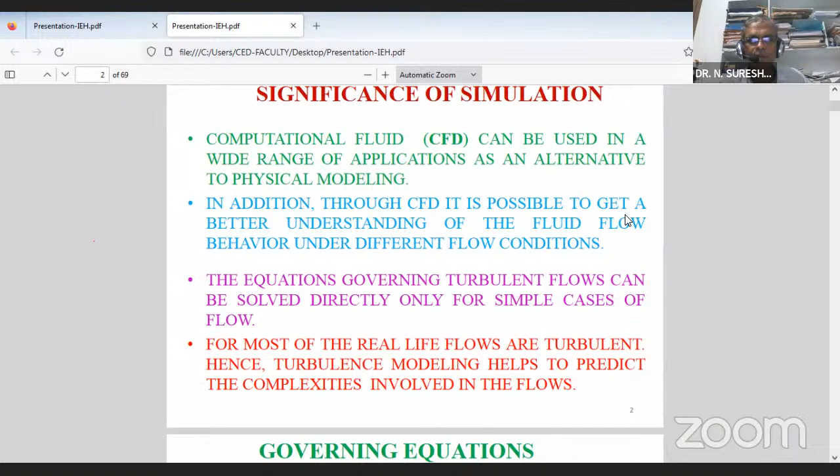The governing equations are given here - these are the equations used in the modeling aspect. There are actually 3 momentum equations and 1 continuity equation, so 4 equations total, and 4 unknowns: velocity component along the x direction, velocity component along the y direction, velocity component along the z direction, as well as the pressure term. So with 4 equations and 4 unknowns, there is no problem as long as the flow is in laminar state.

But when it comes to turbulent flow, there are additional terms coming into picture, primarily because of the fluctuating velocity components - u prime, v prime, and w prime. So the number of unknowns has actually become 7, whereas the available equations remain only 4. To cope with this scenario, these fluctuating velocity components are expressed as a function of mean motion so that the problem can be solved.

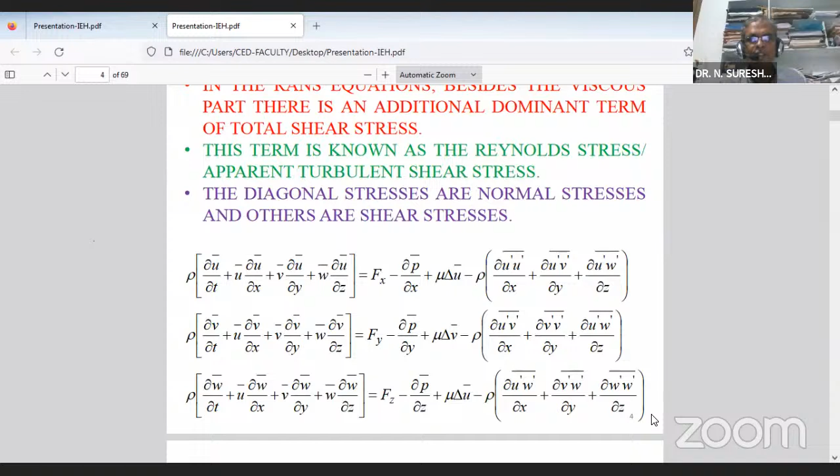This is what is called the closure problem. Closure problems basically make use of turbulence models. Two of the popularly used turbulence models are K-epsilon and K-omega.

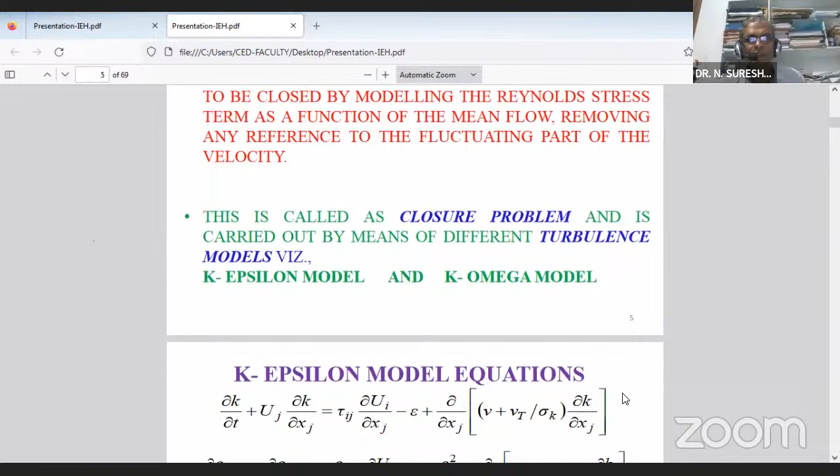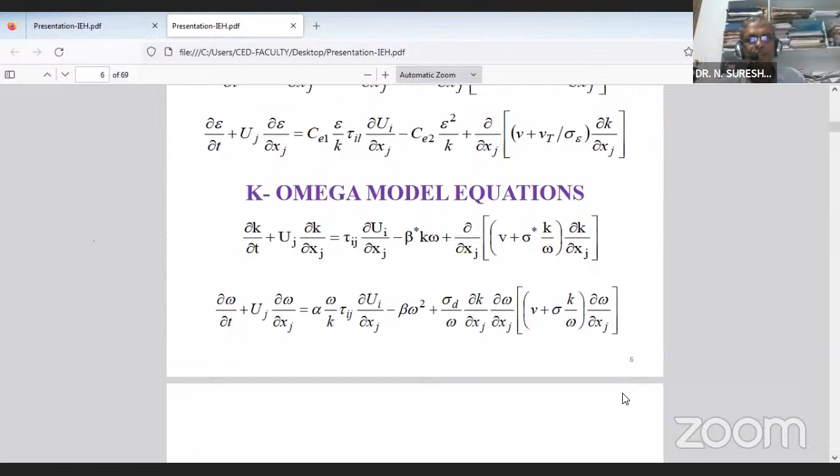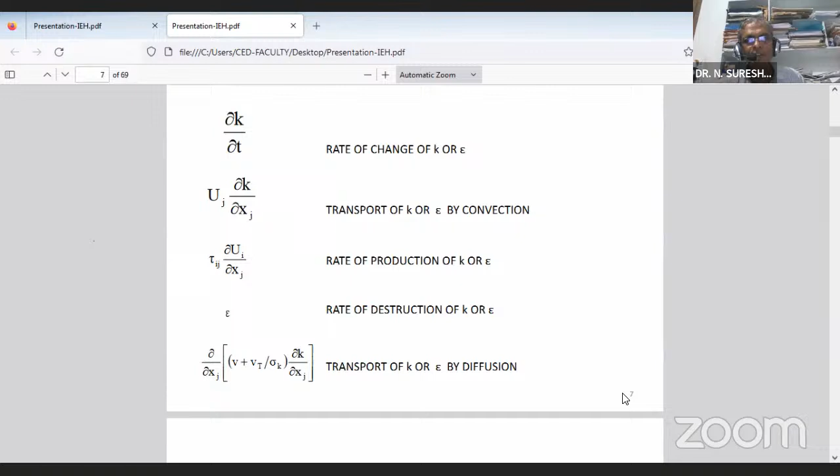The equations of the K-epsilon and K-omega models are given here. Each of these terms on the left-hand side as well as right-hand side represent: the rate of change of kinetic energy or energy dissipation, transport of K or epsilon by convection, rate of production of K or epsilon, rate of change of destruction of K or epsilon, and transport of K or epsilon by diffusion.

In case of simulation models, it consists of 3 stages: one is pre-processing, another is processing, and the third is post-processing. In pre-processing, one has to create the geometry - that means whatever the physical structure that is available, it has to be drawn to a suitable scale.

Generally, scale models are being adopted to create the geometry, depending upon the size of the model, so an appropriate scale model can be selected. There are different softwares available; one can even do it in AutoCAD or Design Modeler, and that can be imported into the software. ANSYS Fluent is one of the popularly adopted software for CFD purposes.

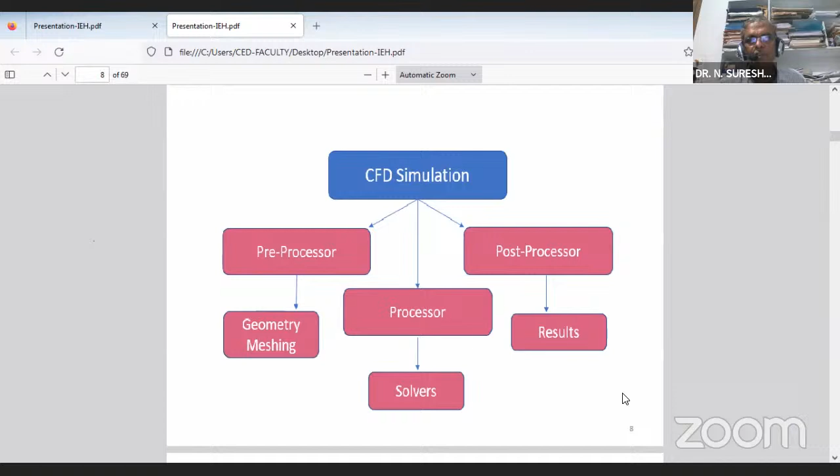Later on, one has to do meshing, which is generally done in order to discretize the flow field. Then from there, you go for the processing. In the processing, there are different solvers, and after making use of the solvers, you go for the post-processing wherein the results will be indicated.

The different solvers used in the processing stage are given here briefly. There are two types of solvers: pressure-based solver and density-based solver. Basically in civil water resources engineering applications, we make use of the pressure-based solver because density generally remains constant.

So either one can go for segregated algorithm or coupled algorithm. Generally, segregated algorithm is adopted, because the governing equations, that is continuity equation as well as momentum equations, are solved in a sequential manner rather than simultaneously. Some of the popularly adopted models are SIMPLE, semi-implicit method for pressure linked equations, or otherwise PISO is also adopted, which takes little less time.

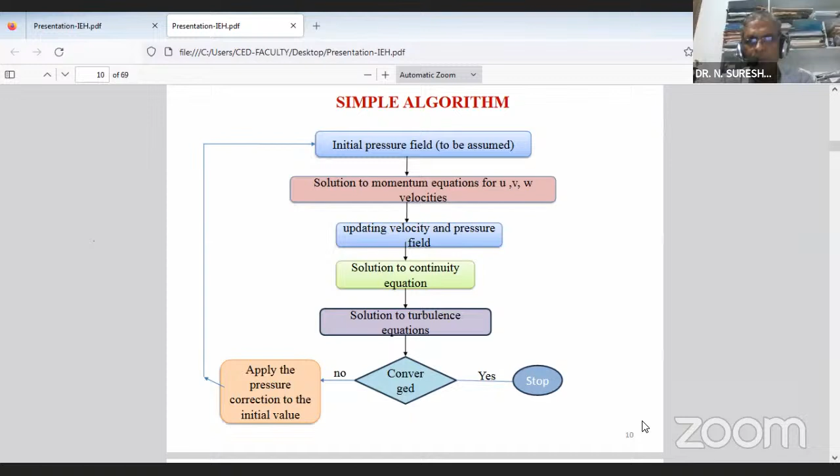The algorithm adopted in case of SIMPLE is given here. What one needs to do is assume some pressure field, then solve for the momentum equations as well as velocity components, then update the pressure field and substitute it in the continuity equation, then solve for the turbulence models. If the solution has converged, there is no problem; otherwise, you apply the updated pressure correction to the initially assumed pressure field. This process goes on in an iterative loop till the solution converges.

So what happens is, most of the time, or at least some of the times, the results obtained from the simulation models are not directly readable. They only provide qualitative information, not quantitative information. Under such circumstances, one has to go for what is called a user-defined function. A UDF is generally programmed in C language, and it can be loaded into the ANSYS Fluent software to get the quantitative information.

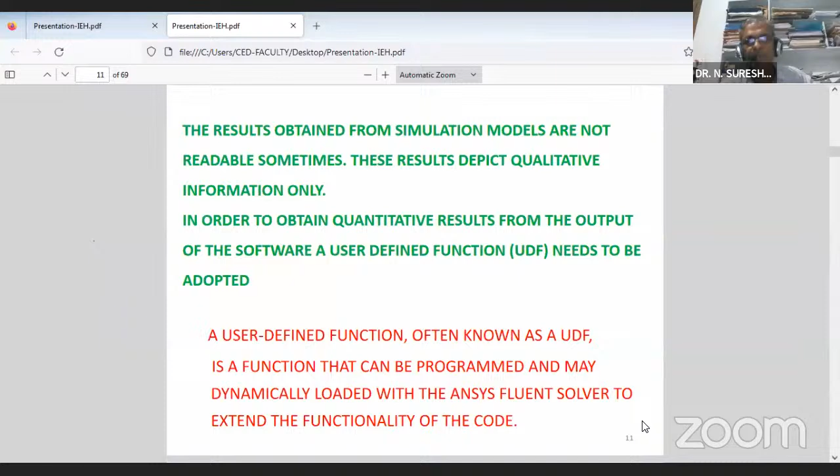Some of the features are given here, which one can program in C language. It has to make use of a udf.h file, then it has to be loaded into the software so as to get the desired information. That is what is done when the quantitative information is not available from the output of the software.

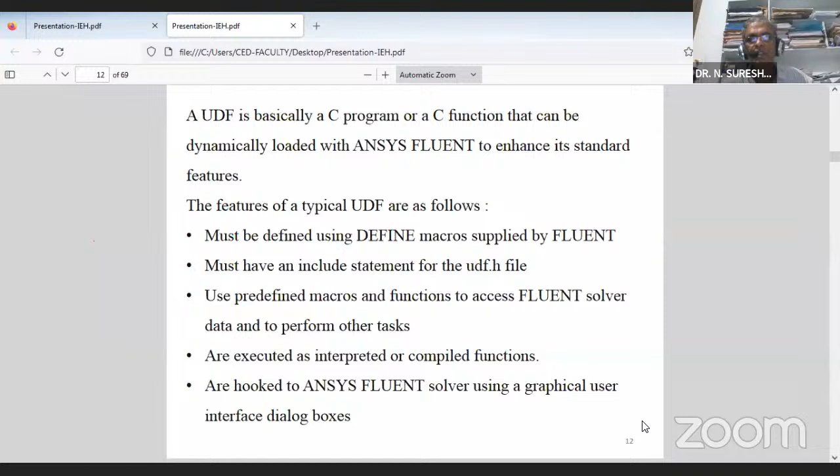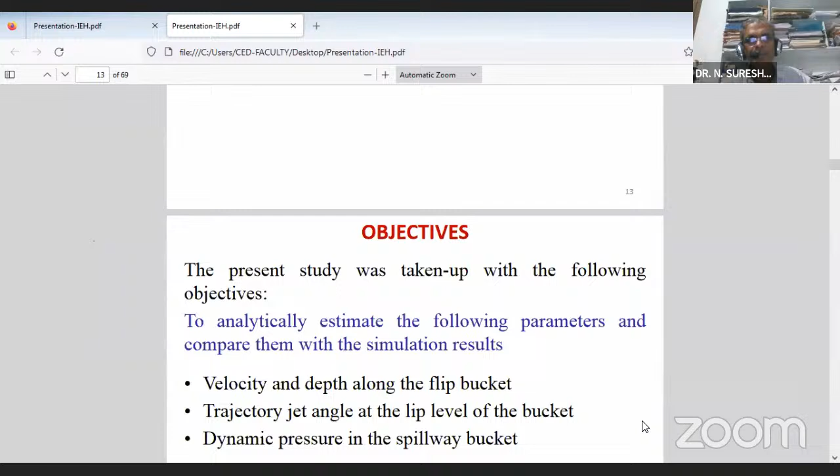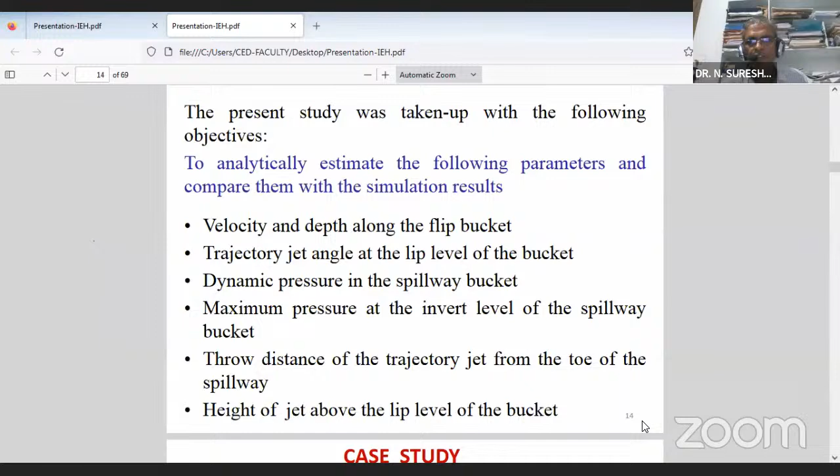This has been taken up with the objectives to compute the velocity as well as depth of flow along the flip bucket, then the trajectory, jet angle as it leaves the spillway bucket, dynamic pressure, maximum pressure, the distance of jet throw, as well as the height above the center line of the lip level of the bucket to the trajectory center line. Generally, to evaluate these parameters, physical modeling is normally done, but here we have gone for simulation.

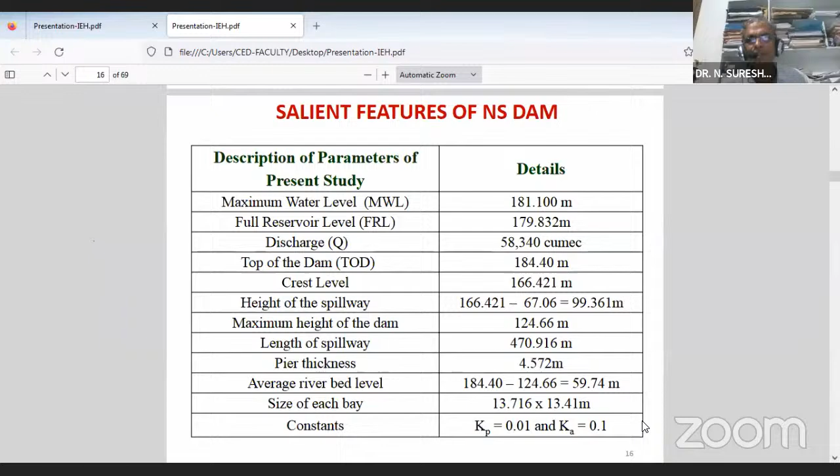The case study taken was the Nagarjuna Sagar Dam. The salient features are given here; the data has been taken from the irrigation department and is available on the website. Since most of the audience are field engineers, they may know these details much better than me. For the spillway profile, we adopted the USBR Waterways Experimental Station equation. We then computed the Froude number, and when you know the value of the Froude number, you can evaluate the bucket angle at the lip level of the bucket.

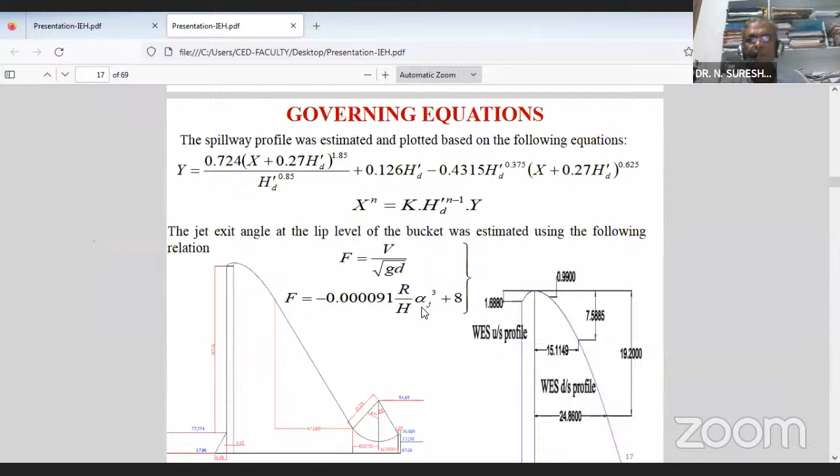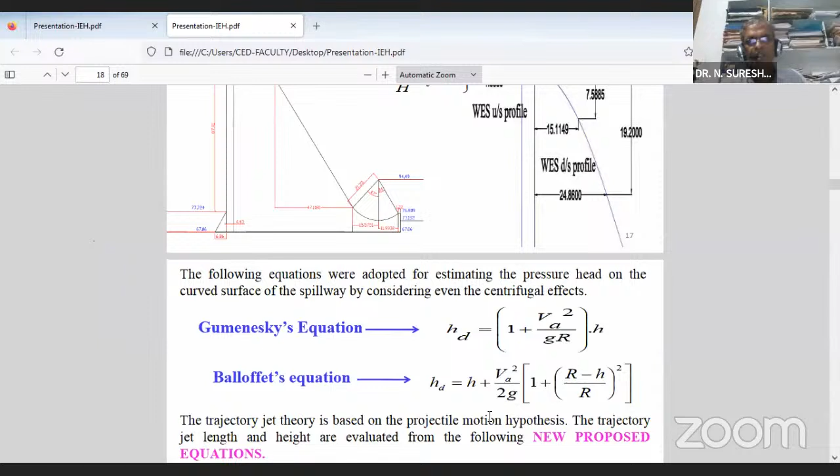Alpha j can be computed making use of the value of the Froude number. Then, in order to compute the maximum pressure in the bucket, two equations have been used: one is Gumenesky's equation and the other is Balloffet's equation.

Here, VA is the actual velocity of approach. But if you want the actual velocity of approach, one can only get the theoretical velocity of approach if you know the head over the spillway crest, as well as the height of the crest. From that, you will be able to compute it. An equation is available in the literature, so based on that, one can compute the theoretical velocity.

In the literature, a chart is also available showing the ratio between V actual and V theoretical. That ratio can be obtained from the chart available in the literature, and that is how one will be able to compute the value of V actual. Knowing V actual, one will be able to evaluate the value of HD.

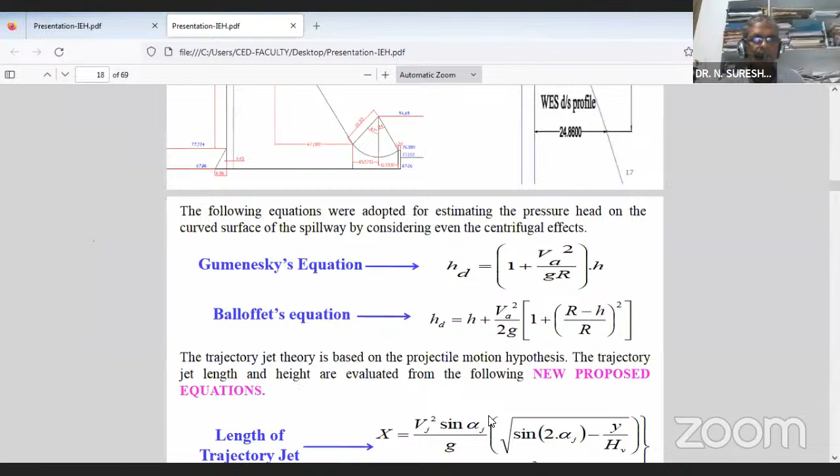Then, in order to evaluate the location of the impact point, we have proposed two equations. These equations are actually not available in the literature; we have proposed them based on the trajectory of the jet.

So, what is the location of the impact point from the spillway bucket outer edge point, as well as y, which is taken as the height from the lip level of the bucket to the center line of the trajectory. These are the equations which we have proposed.

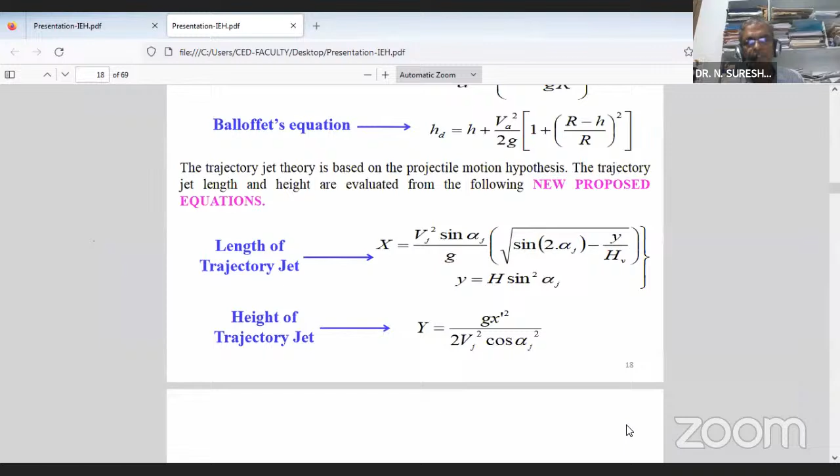These equations have been evaluated from the simulation results; from the simulation, we have actually proposed these two equations. First, because we were not sure what result we would get, we made analytical estimates.

From the continuity equation, Q equals area times velocity. You know the value of the discharge per unit length of the spillway: capital Q divided by L gives you small q, and small q divided by D0 gives the velocity in terms of Q by D. That is how the energy on the upstream side and at this point becomes available.

So you equate the energy at D0 and D1, or D1 and D2, to obtain the values of depth of flow in terms of Q, using a trial and error procedure. That is how we obtained the values of D0, D1 and D2. Knowing the depth of flow, we then computed velocity.

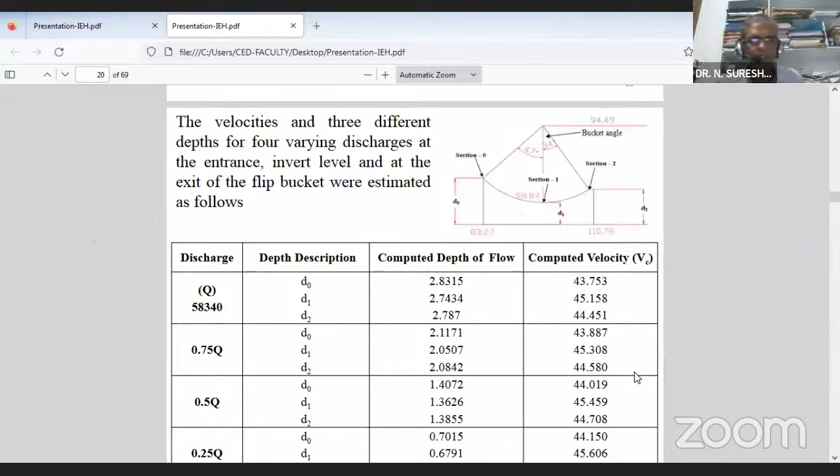So the depth of flow, the invert level of the bucket, the lip level of the bucket, and the trajectory angle—all these values we have computed for different flow rates.

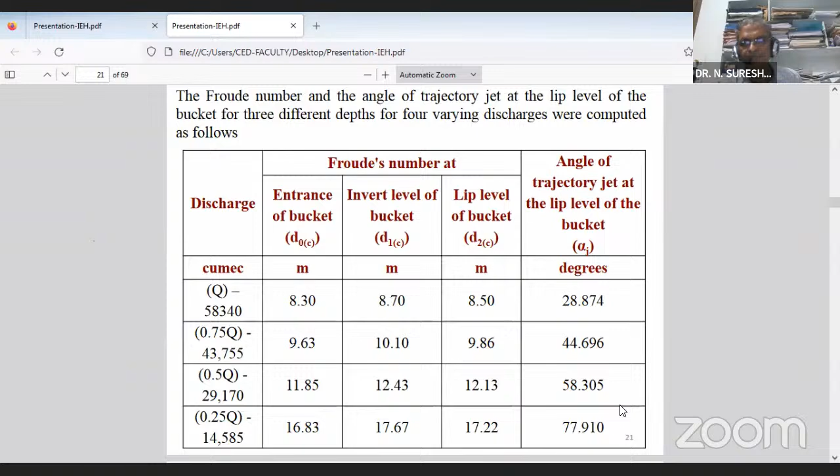Then dynamic pressure has been computed from half rho u v square, half rho u square, and the maximum pressure at the invert level of the bucket has been computed from either Gominski's equation or Balloffet's equation.

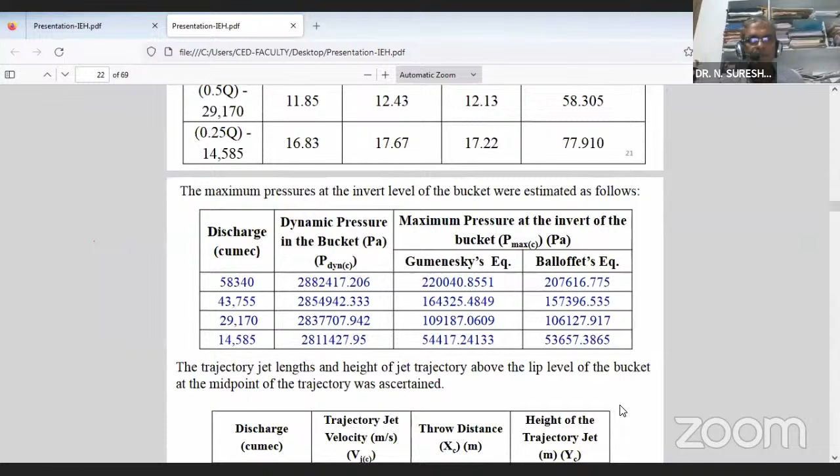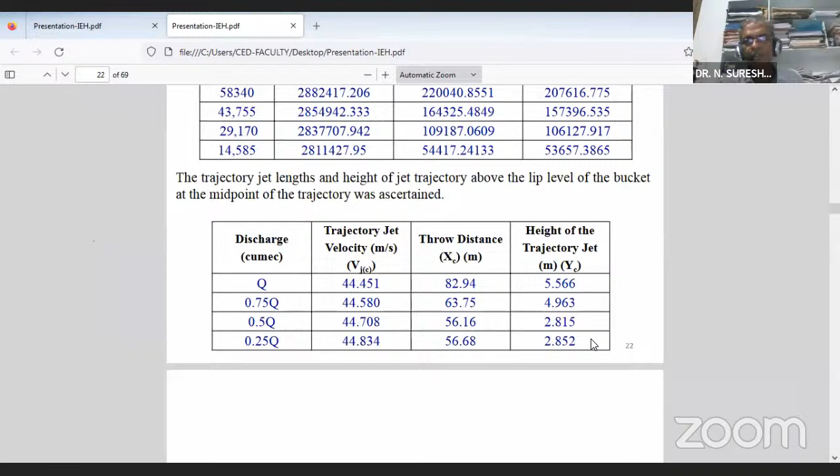So these are the throw distance as well as the height of the trajectory jet, which have been computed with the equations proposed by us. So these are all analytical equations. Then we have gone for the simulation.

The dam, that means the Nagarjunasagar dam, has been drawn to 1:100 scale. The boundary conditions are: we have given the velocity inlet, that means the velocity with which water is approaching over the crest of the spillway. And because on the top as well as downstream side there is atmospheric pressure, we have defined it as pressure outlet. Then we have gone for the meshing.

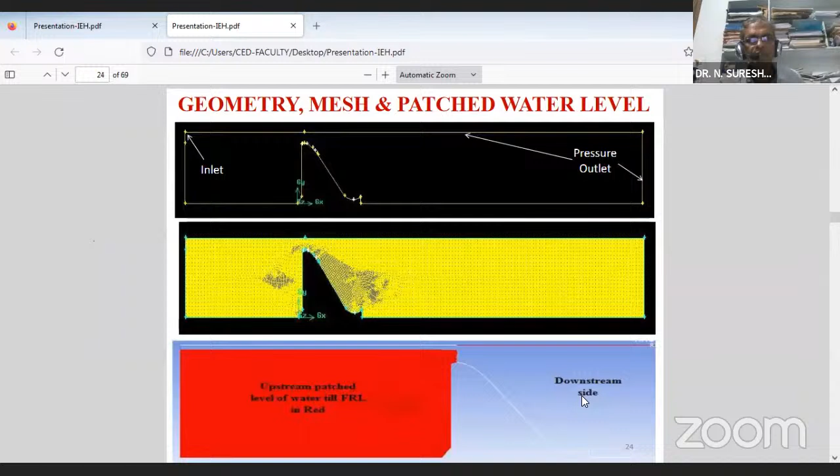In order to reduce the CPU time, we have initialized the flow condition. That means we have filled up water on the upstream side of the reservoir up to FRL, and then started the simulation. Here is the water surface profile as it glides down the spillway. We have extended our simulation process till it reaches the downstream end of the structure.

From the output of the software, you only get qualitative information. Here, red color represents water and blue color represents air, so this is a multi-phase problem. But it will not give you the actual values, so for that purpose we have gone for the UDF, user-defined function.

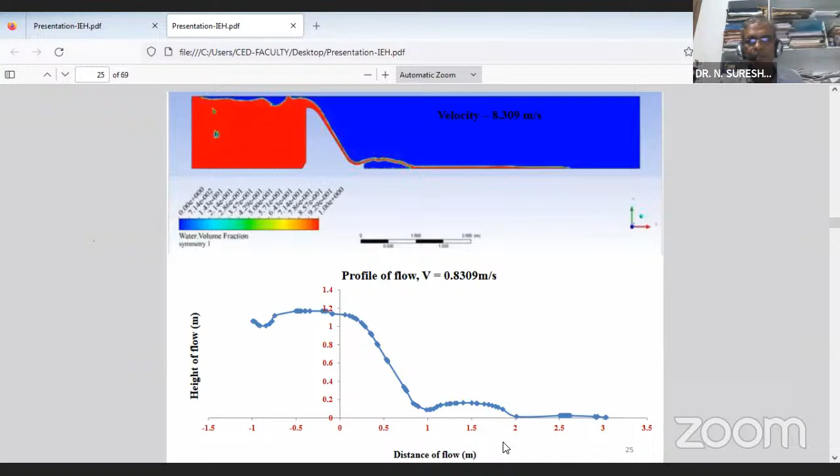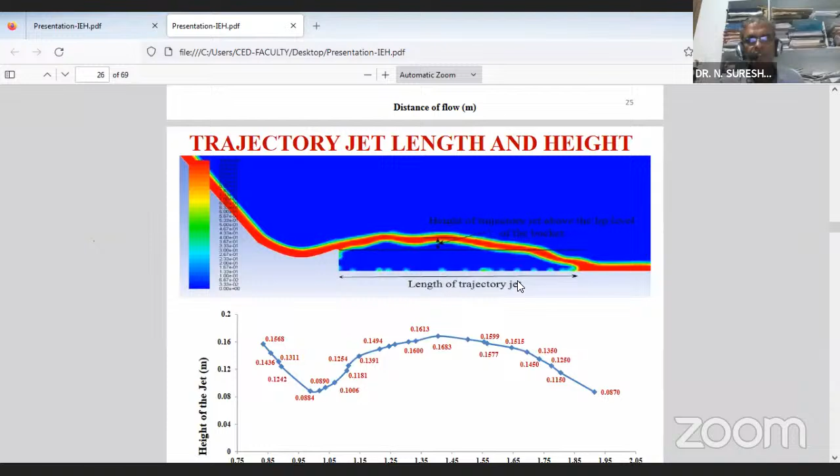That is how we have evaluated the values at different sections, taken from the axis of the spillway. This is the spillway edge, from the top of the lip level of the bucket up to the center line of the trajectory, which has been taken as Y. And from the spillway edge to the impact point has been taken as the X value. That is how we have computed the values of the trajectory jet all along its length as well as height.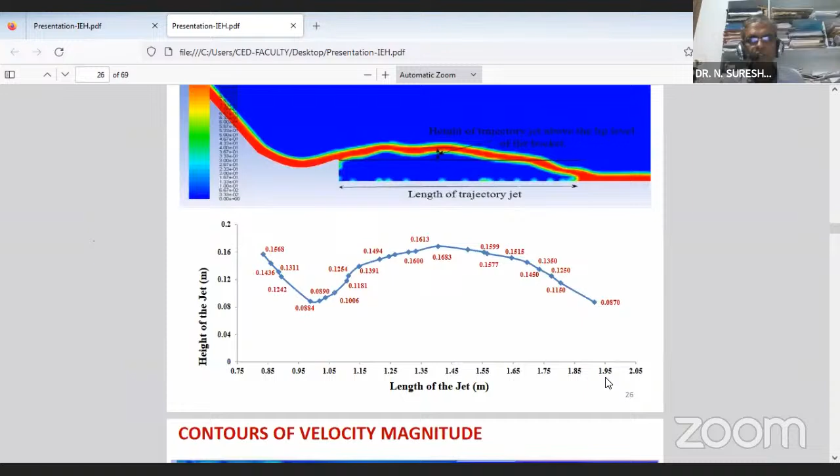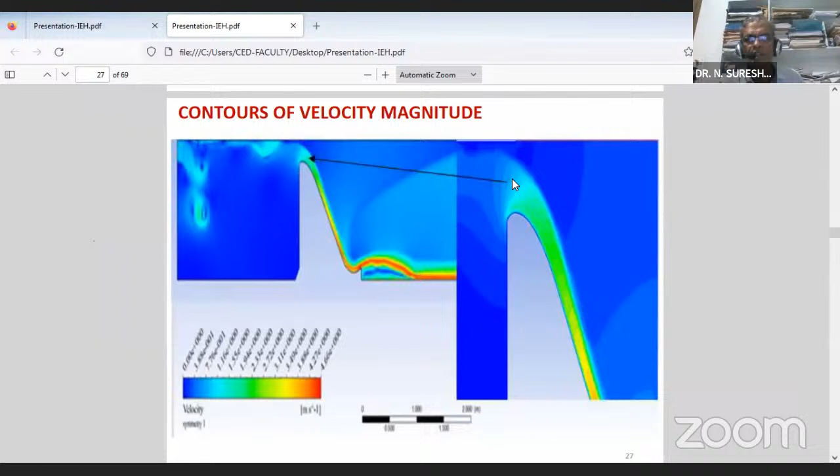Here, one can see the velocity magnitudes over the crest of the spillway. This is the enlarged version over the crest of the spillway, though the scale is not clearly visible. There is negative pressure here, but that negative pressure is not going to extend down the spillway. As it comes, there is increase in velocity, and further down the flow velocity has increased even more. So there is no problem that this is likely to extend, because it's only a minor region, and this is corroborated with information available in the literature.

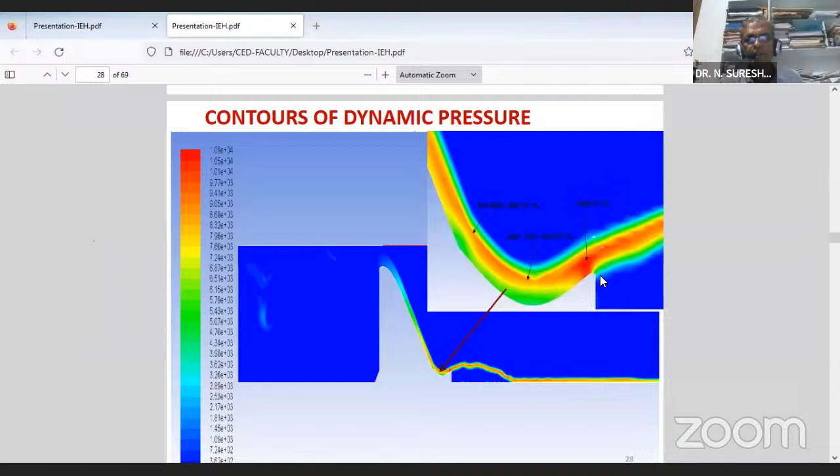Then contours of dynamic pressure—this is the spillway bucket, this portion. So we have computed the maximum pressure in the spillway bucket. We have evaluated all these values from the simulation: the depth of flow in the bucket, throw distance, height, dynamic pressure in the bucket, and maximum pressure at the invert level of the bucket.

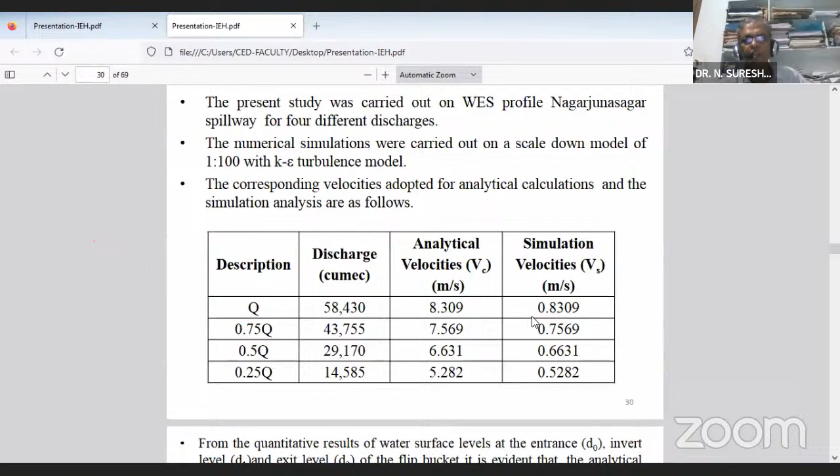All these values have been evaluated from the simulation results. One can see here the analytical velocity—because it has been adopted to a 1:100 scale, when you convert it, that's how it becomes 0.8309 for the simulated velocity.

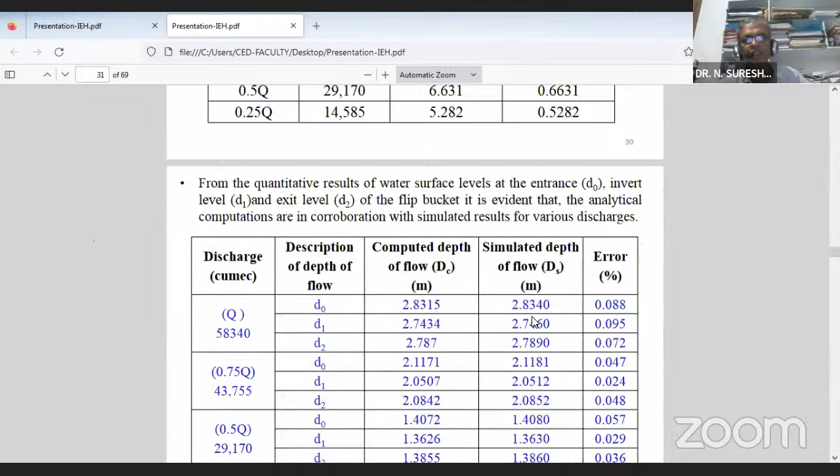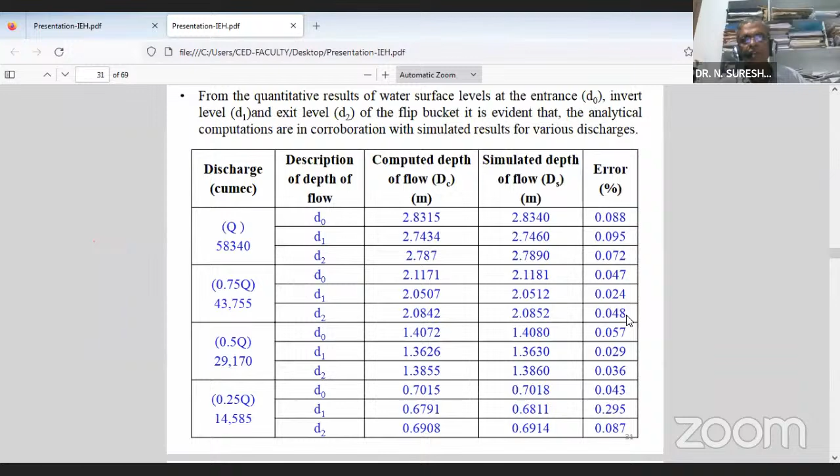Here is the comparison between the computed depth of flow for D0, D1, and D2 and the simulated flow. Hardly there is any error—the error involved in the process is less than 1%. Even for velocities, there is not much variation.

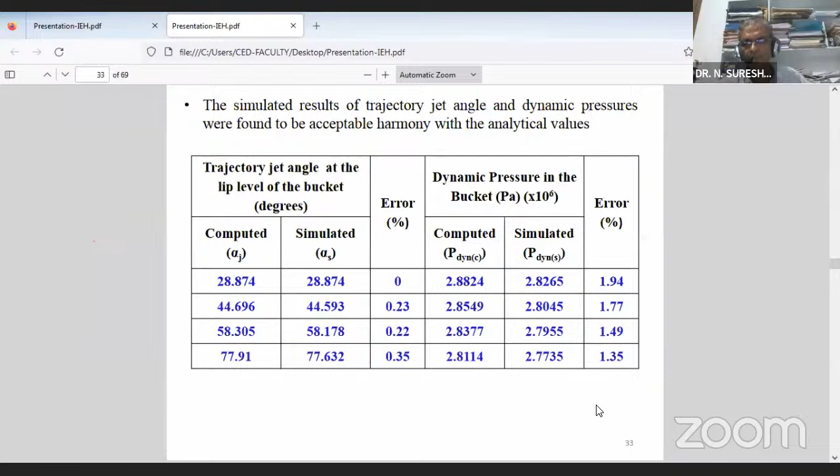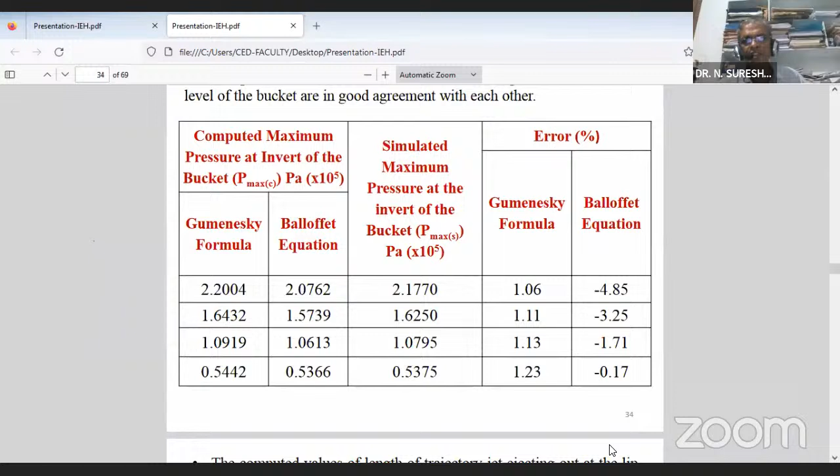Then these are the maximum pressure in the bucket according to Gumenesky's as well as Balloffet's equation. In Gumenesky's case, the percentage of error is less than around 1.5%. Here there is a negative percentage of error, amounting to approximately 5%.

So ultimately this was our key point of interest: what is the distance the jet travels as water glides over the spillway in case of the ski jump bucket type arrangement. There is hardly any error for different flow rates—maximum design discharge, 75% of design discharge, 50%, 25%. In all these cases, the computed value is based on the equation proposed by us using trajectory jet theory, and the simulated values come from the software.

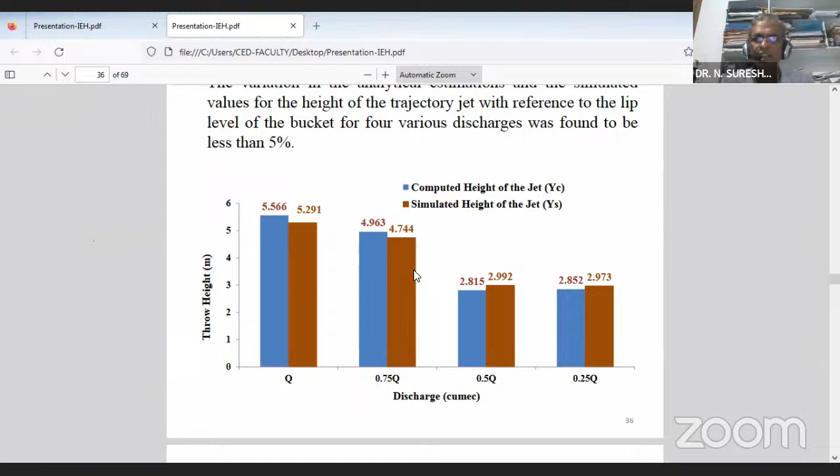Similarly, even for height also we have computed, and there is hardly any error. So this is one of the first applications.

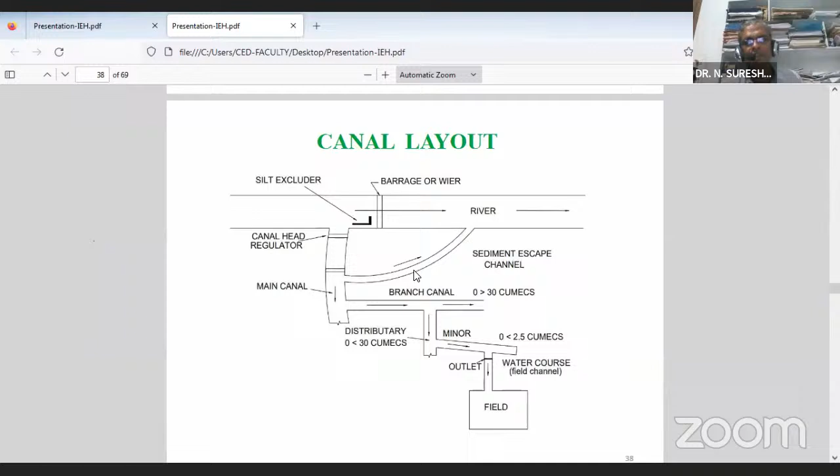The second application we have gone into is flow bifurcation into lateral channels. That means whenever water is to be let out to lateral channels, you need to discharge your intended flow into that lateral channel. Generally, in case of flow into lateral channels, a vertical lift gate, a mechanical arrangement, is provided. This is the general arrangement: water goes from main canal to branch canal, then branch canal to minor, then to outlet. These are all you are very much acquainted with.

So basically, one has to see that the intended discharge should go into the lateral channel. Then only the problems in the command area can be averted. Otherwise, farmers in the command area will always say we have not actually got our intended share of flow rate, and as a result there are disputes.

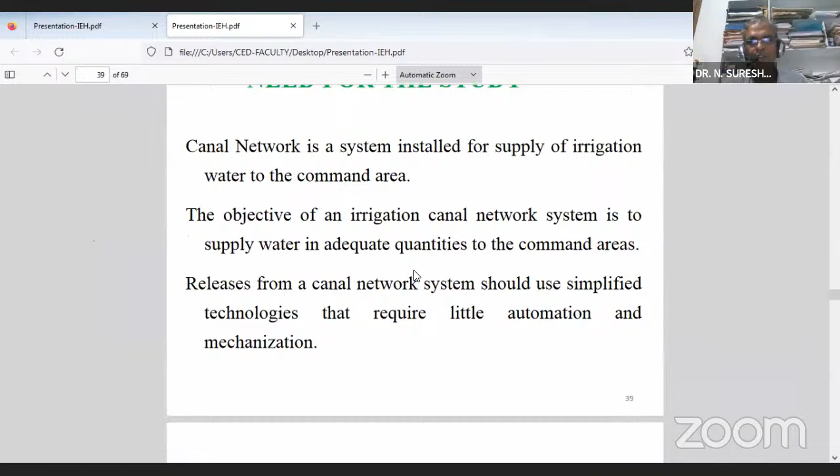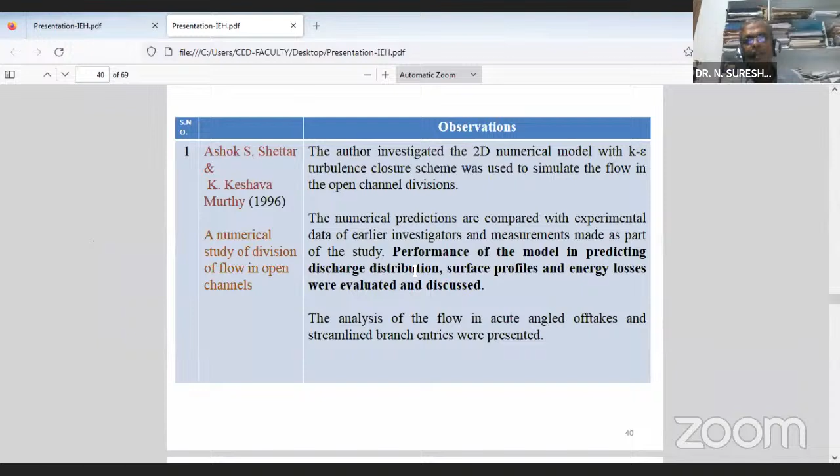To overcome that problem, we have gone for a simple system without any kind of mechanization in the process. One author who studied what kind of alignment should be made for lateral channels proposed that acute angles should not be encouraged. So the objective of this present study is to develop a simple and efficient ungated system so that mechanical arrangements can be avoided, while also ensuring that the design flow rate goes into the lateral channel.

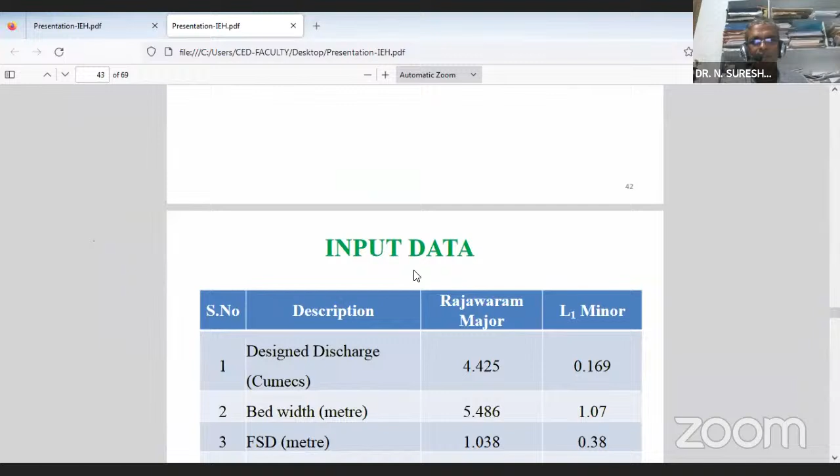We have taken the case study of Nagarjuna left bank canal, Rajawaram major distributary. This is the input data: flow rate, bed width, full supply depth, and velocity. We have taken one of the minors, and the intended flow rate into the minor was 0.169.

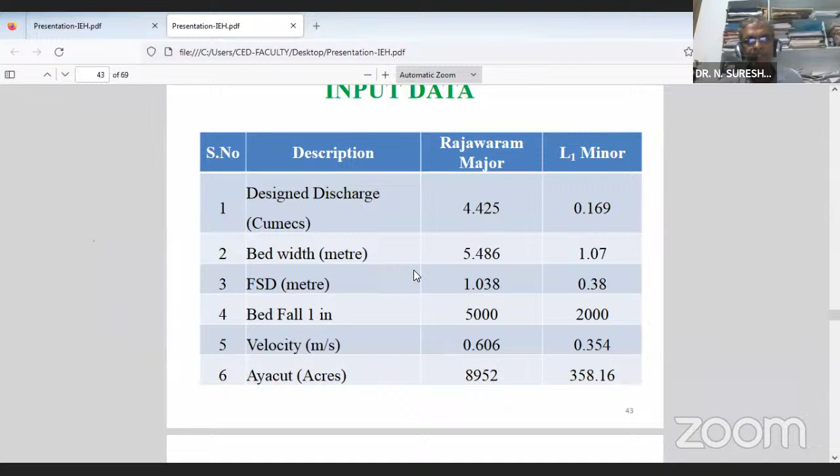So what is the difference in depth of flow between the distributary and the minor? By that much amount, the liquid level in the minor comes down. Because water is available at a lower level, obviously the area that is going to be commanded by the system is going to be on the lower side.

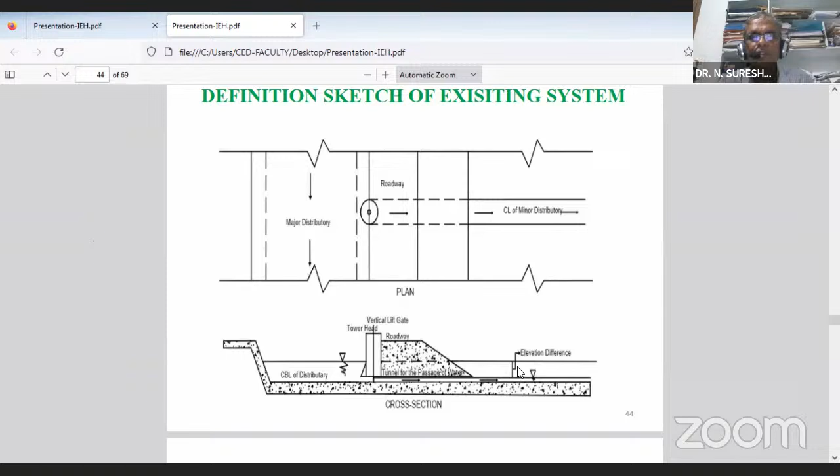To overcome this problem, what we have proposed is, instead of a 90 degree alignment, why can't we make it a 110 degree alignment? The logic is very simple: when you want to take a turn on a road, if you have a 90 degree turn, it becomes difficult to take the turn. On the other hand, with a 110 degree alignment, one can easily go without much difficulty.

So in order to see that the water passes easily - in case of 90 degree alignment, it is becoming harder for the water to enter into the lateral. To overcome that problem, we have made the alignment of the minor with the axis of the distributary a 110 degree alignment.

Not only that, because the area commanded by the system is coming down, we have proposed to match the liquid levels of the major distributary as well as the minor, so that we keep the same free surface level in both systems. That is how we have actually raised the bed level of the minor - by whatever difference exists between the flow depths, by that much amount we have raised the bed level of the minor.

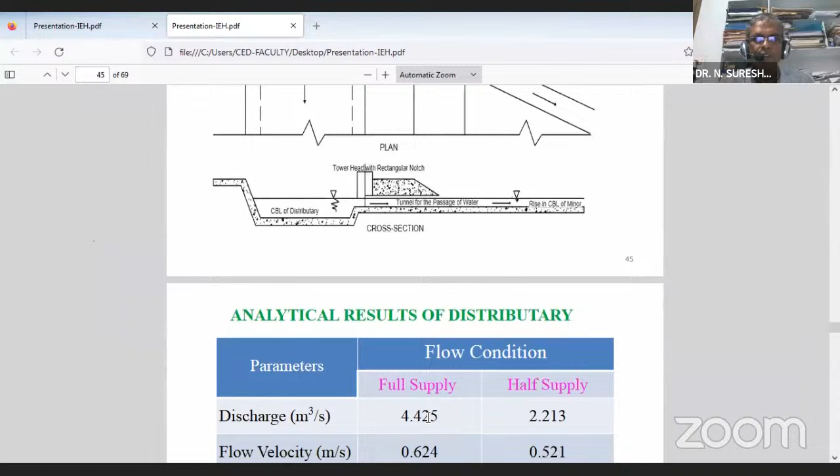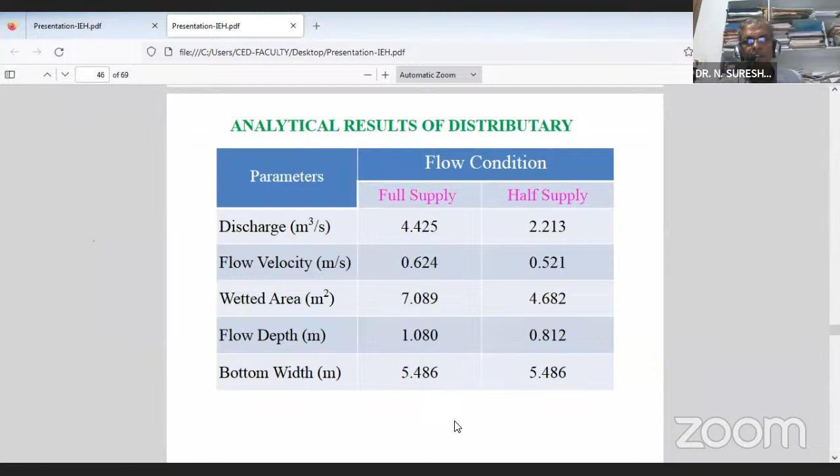So what we have done is first analyze the results. These are the results of the major distributary for full supply as well as half supply - these are all constants, and one can get them according to the data that is available. We have even computed the values for the L1 minor.

Here, because in the existing system, there is actually a mechanical arrangement available.

Yes. Yes, is there any query? I have no problem in answering queries even during my presentation.

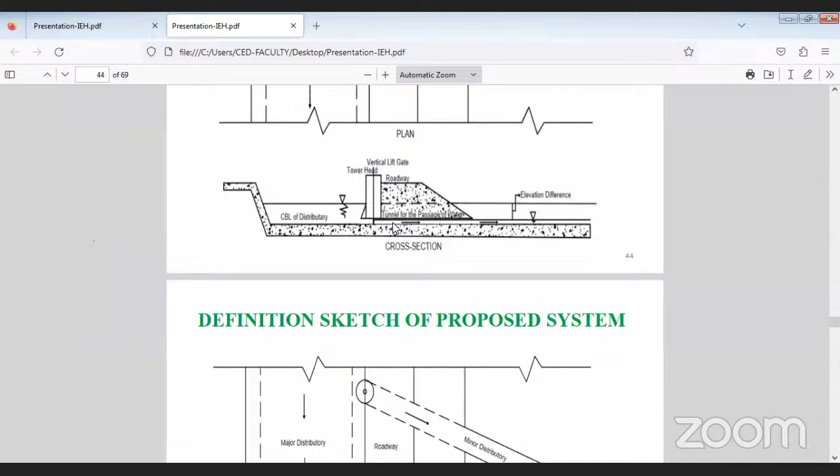There is a tower head and a vertical lift gate provided here, which will be operated from this tower head. So if you calculate what should be the amount of gate opening corresponding to the flow rate you wanted to release into the lateral channel, accordingly this gate opening has to be computed and kept, whether it is for full supply or half supply, and operated as per the requirement.

So obviously, because the gate opening is computed as per the intended flow rate, you are likely to get the desired result, meaning whatever flow rate you wanted to allow into the channel will go into the channel. But the only problem is one should not mishandle the system after the line organization staff goes off.

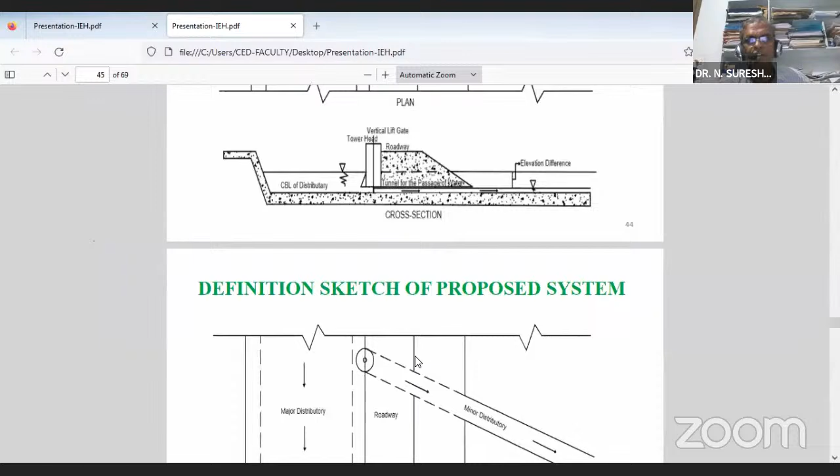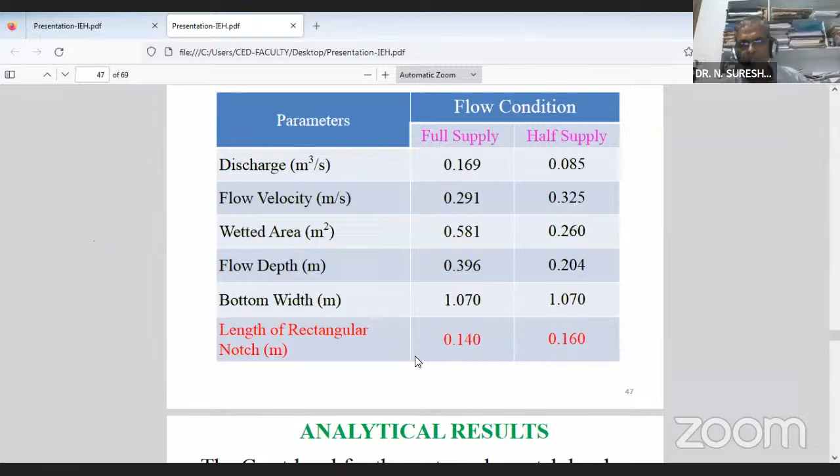So what we have done is, instead of a mechanical arrangement, we have proposed a rectangular notch. And what is the length of the rectangular notch? We have computed for full supply flow rate, it has come as 14 centimeters, and for half supply, it has come as 16 centimeters. The definition sketch is given here.

We have mapped corresponding to the half supply flow rate, the liquid levels both in the major distributary as well as the minor. So for half supply flow rate, these FSLs are at the same level. As a result, the bed level of the minor has been raised by around 2 feet, meaning water is available at a higher level, so one can actually command a lot of area.

Whereas in case of full supply, because you cannot actually change, we wanted to map the same at 0.607 at the same level, since the bed level cannot be changed once it is constructed. So for full supply condition, the liquid level has actually dropped by around 3 inches.

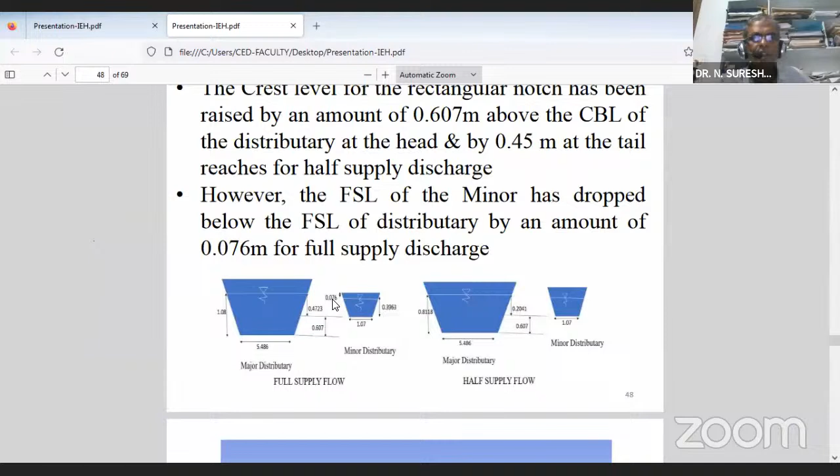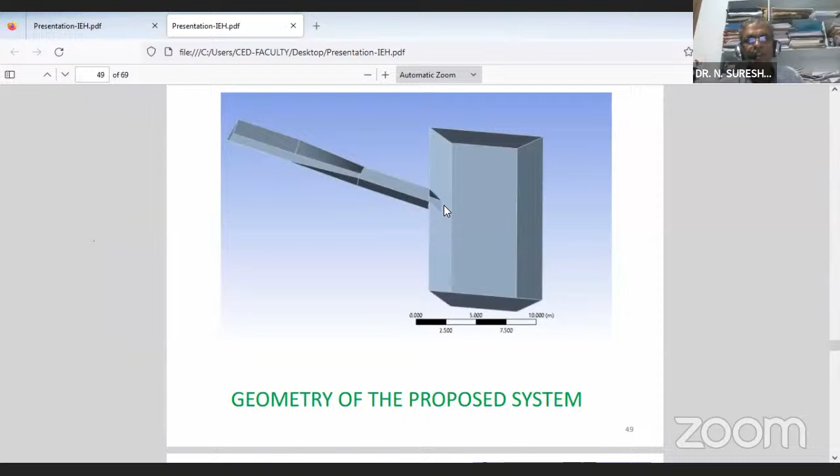So this is what we have done, we have created this geometry in design modeler. This is the geometry of the system. This is the main canal, this is the distributary, sorry minor — this is the major distributary, and this is L1 minor.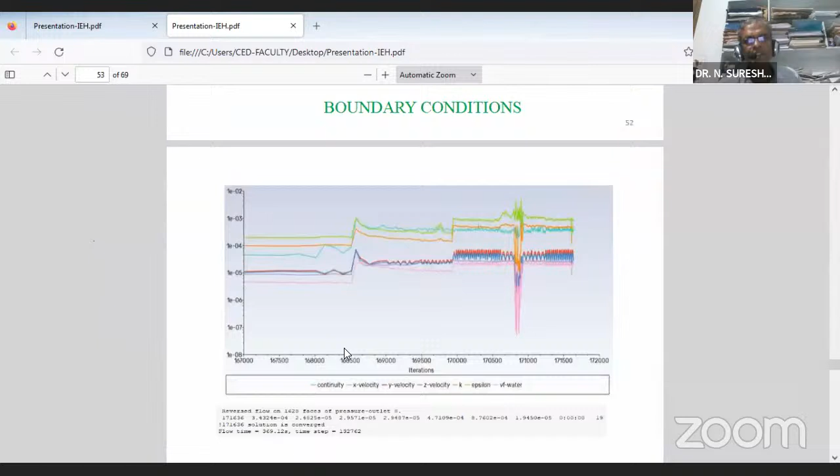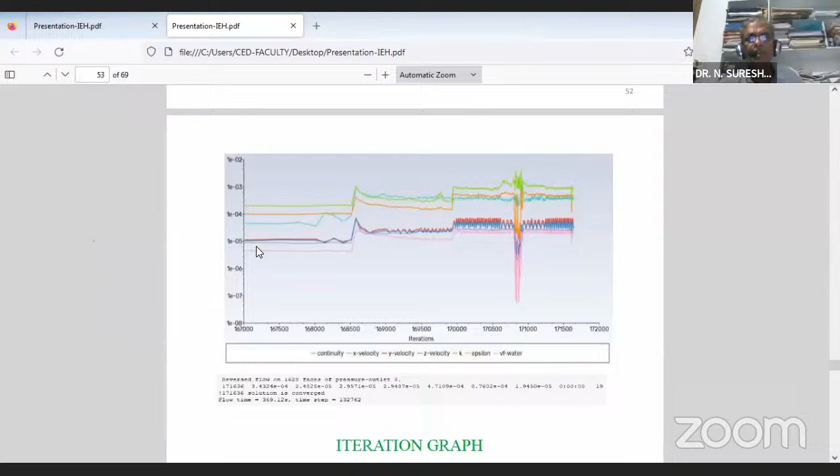Then we have run the solution till it converges for all these parameters: continuity equation, velocity components x, y, and z, as well as k-epsilon, until they come down below 1 into 10 to the power minus 5. That is the acceptable criteria for convergence. Till such time we have run the solution.

And here the contours of volume fraction are indicated. This red color represents the water and blue color represents the air. So this is the flow in the distributary, and this is the flow taking place in the minor.

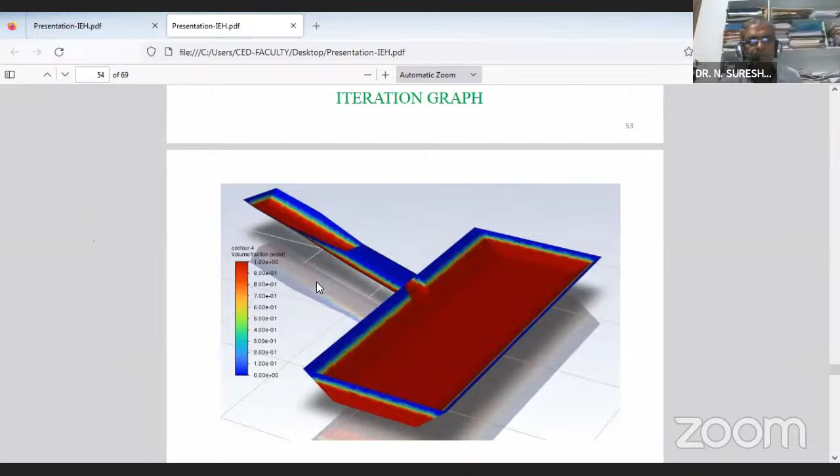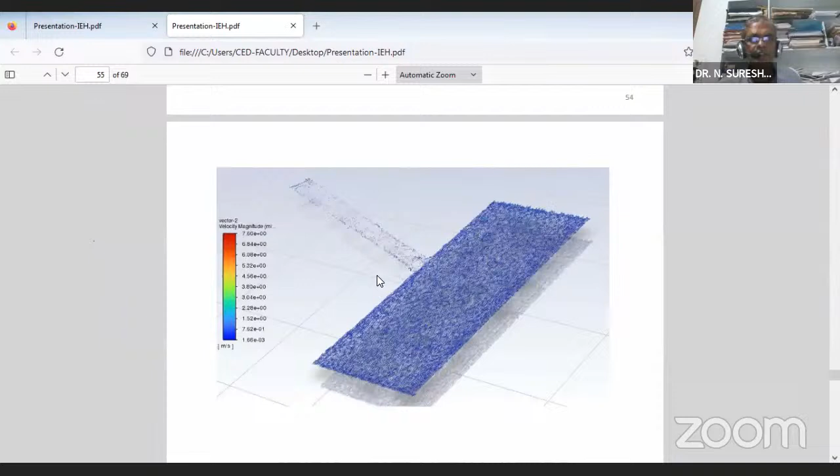So we have evaluated what is the flow velocity in the minor and what is the depth of flow in the minor. Flow velocity one can get from the velocity contours as well as velocity vectors, which are available in the post-processing of the software. These are all vectors of velocity magnitude, indicating even the direction.

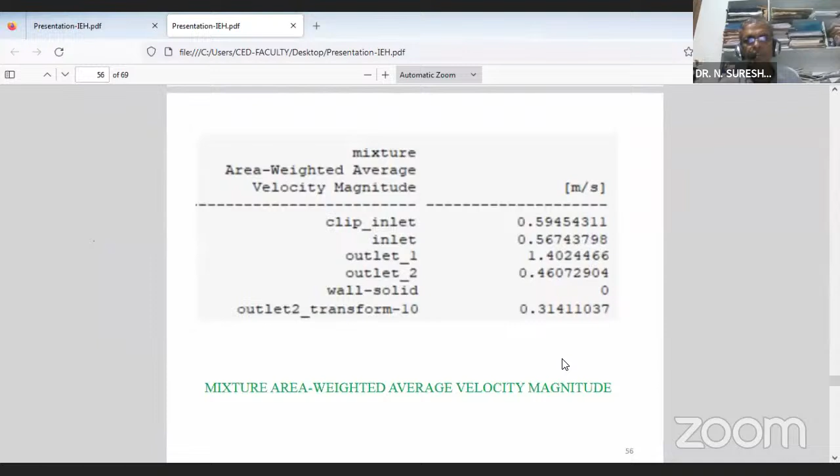Then we have computed the mixture area weighted average velocity as 0.3141 meters per second, which is the simulated velocity. Analytical velocity I have already shown right in the beginning for L1 minor, so there is an error of 3.37%.

So velocity one can read from the software, but depth of flow cannot be obtained directly. For depth of flow, we have adopted a user-defined function and evaluated it as 0.2032, whereas the computed value from the analytical equation was 0.2041. So there is some error, and the flow rate had an error of around 4%. This is for half supply.

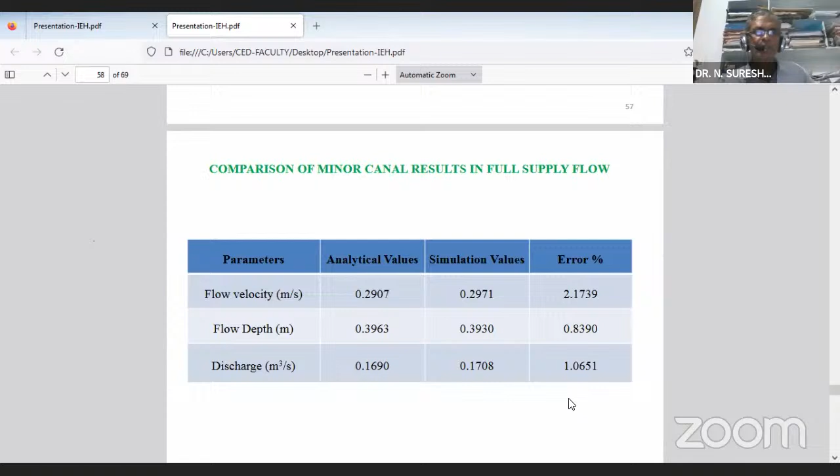Similarly, we have even done the simulation for the full supply also. Here too the amount of error is always less than 3% for important parameters like flow velocity, flow depth, as well as flow rate. Then what we have done is look at what are the consequences if we actually go for the conventional system.

When you go for 90 degrees alignment of the minor, or when you make the angle of alignment to 100 degrees or 110 degrees, what are its consequences?

We have studied three important hydraulic parameters, namely flow velocity, flow depth, and discharge for both half supply and full supply. One can see from this table, the flow rate here was around 0.0812. If you go for 100 degree alignment, that intended flow rate is not actually entering when the alignment is at 100 degrees or even 90 degrees. For 90-degree alignment, it is even much lesser than 100-degree alignment because it becomes harder for the water to take a 90 degrees turn. Similar is the case even for full supply discharge also.

So the intended discharge is being obtained at 110-degree alignment. That's the reason we have not gone for 120 degrees alignment. This information is actually available in the literature. We have proceeded with 110 degrees alignment as the benchmark, that is available in the literature, and it has been proved to be correct.

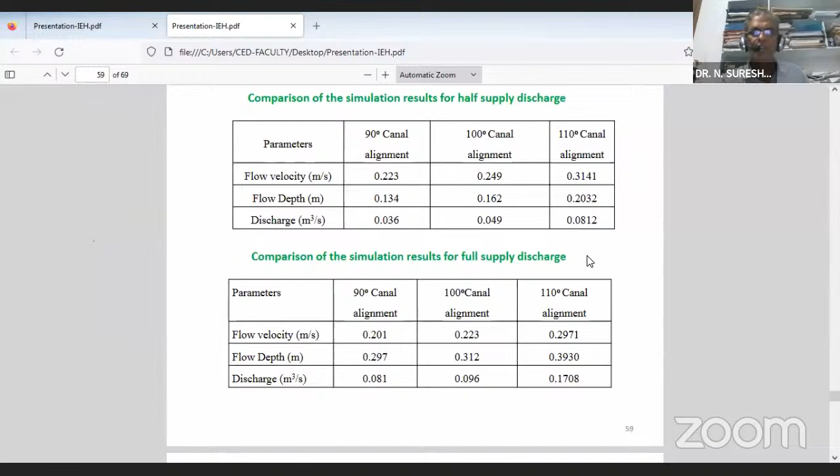Then a similar design concept we have applied for a water treatment plant, wherein the water has to enter into two different lateral channels. The case study which we have taken is a water treatment plant available near Nagarjuna Sagar, Kodandapur. So the flow rate into each channel is 0.784.

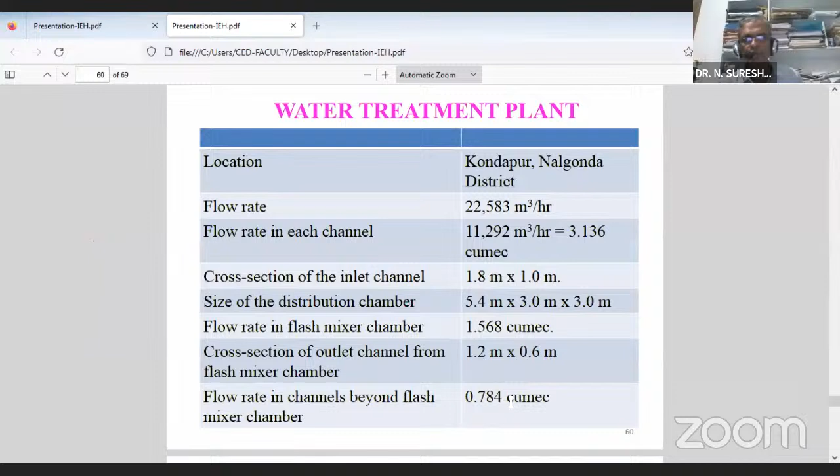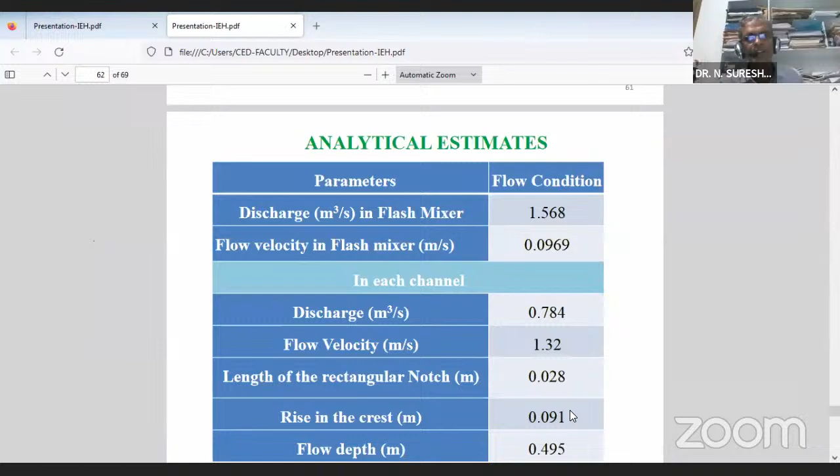So from the flash mixing chamber, water is entering into those two laterals through a vertical lift gate. Instead of going for a vertical lift gate, we have provided a rectangular notch. Here, what we have done is determine by how much amount the crest level of the rectangular notch should be kept above the bed level of the lateral channel, and what should be the length of the rectangular notch. These things we have obtained by trial and error procedure.

So the length of the rectangular notch has been obtained as 0.028 meters, and the crest level of the rectangular notch should be about 9.1 centimeters above the CBL of the lateral.

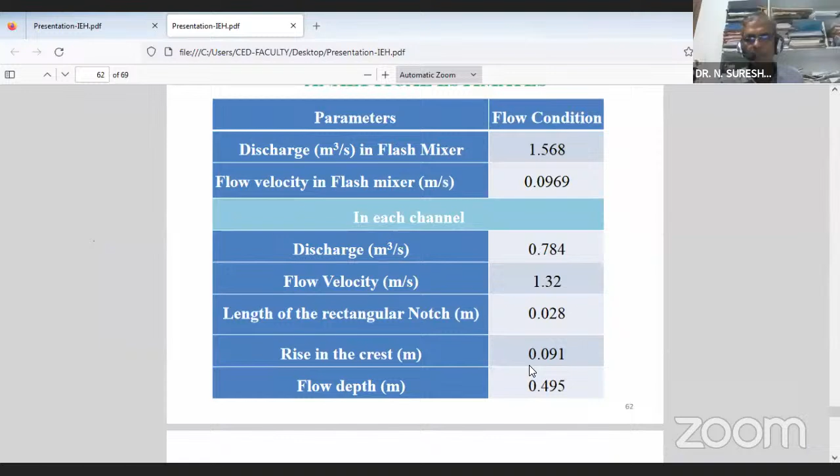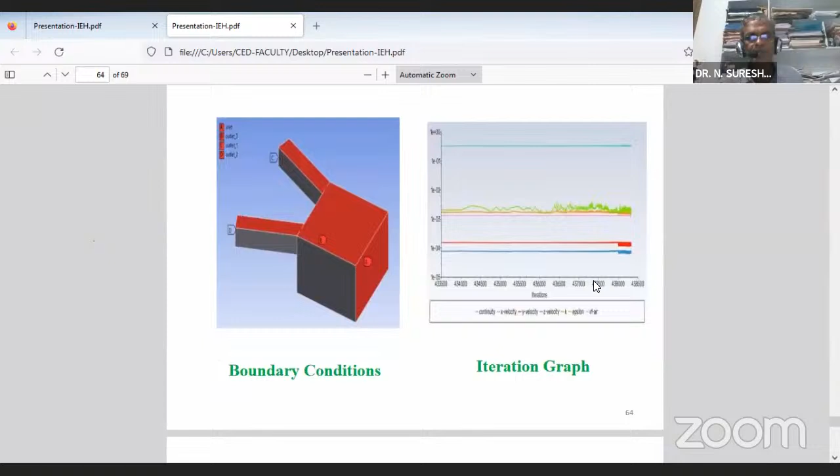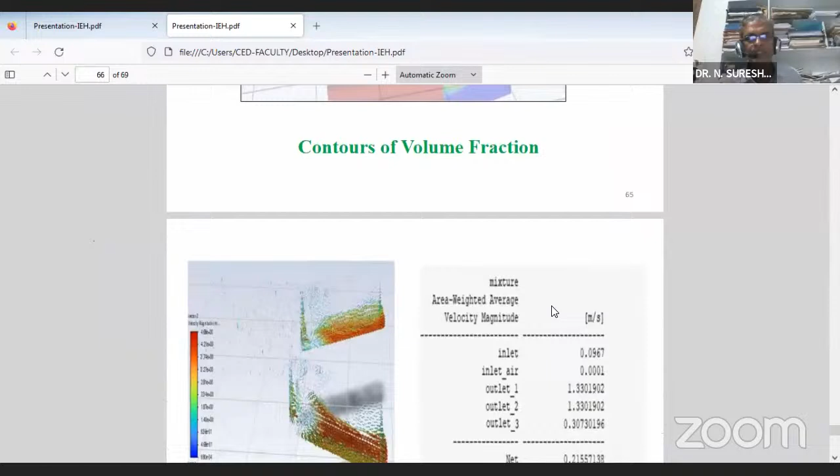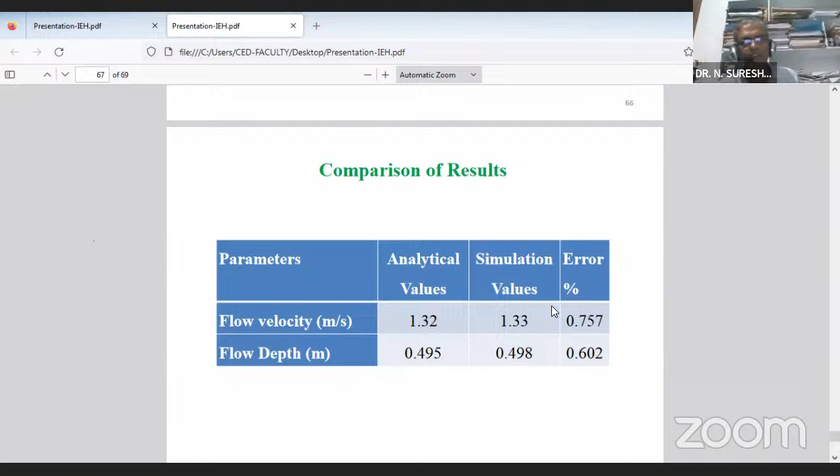So then we evaluated what is the depth of flow from the user-defined function, as well as flow velocity. Of course, one will be able to get it from the vectors itself, so there is no problem, as the software will give it directly. The flow velocity has come as 1.33 meters per second, whereas the analytical value is 1.32. So the percentage of error is always less than 1%.

So in this endeavor, I thank both my research scholars, Ms. Prasanna and Ms. Ramya. Both of them have helped me in the solution of these complex problems. So I thank all the audience for their patient listening, and I'm open for discussion. Thank you.

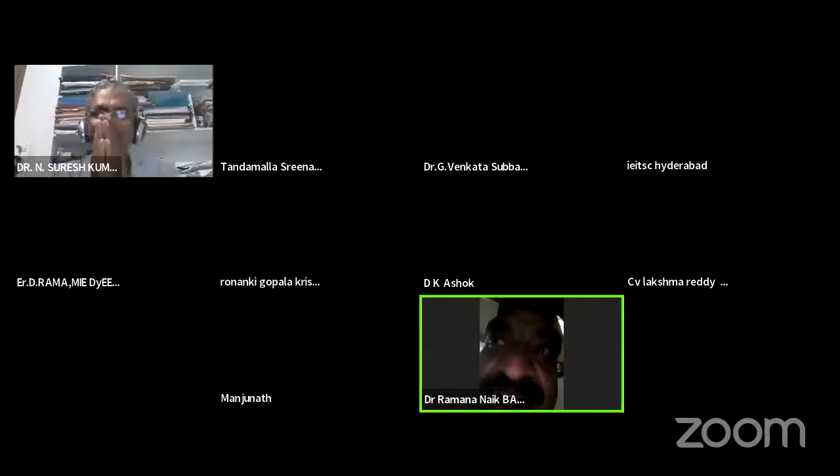Okay, thanks a lot. Professor Ramana here. Ramana, yeah, I could see your face. How are you, sir? Any queries?

Sir, any queries from the participants? Yeah, sure, that is the reason we kept it open for discussion. You go, Professor Ramana here.

Yeah, please, Chairman Saab. Suresh Saab, highly appreciable talk. While presenting your 3D pictures, we want to go for one more talk on Medigadda after a couple of weeks.

For that, a lot of input data is actually required. Yes, sir. Then it is possible. Good day, sir. Thank you, sir. Okay, right.